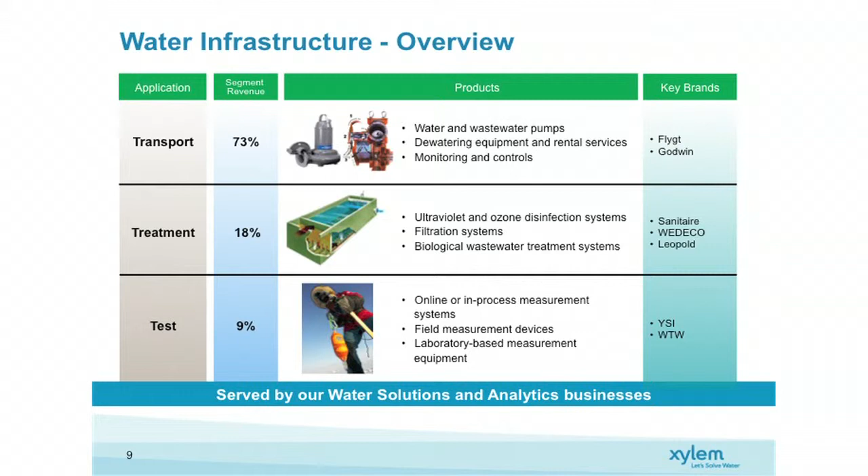But don't you have there, well, we don't do mechanical screens, all right? But we can put those in the system. But everything that has to do with the process control of a plant, be it water treatment or wastewater, be it industrial or municipal, we can design into it.

Okay. This is processing, wastewater treatment and reuse, and we've tried to concentrate on those parts of the process that are integral to the actual operation of the plant to achieve a given quality of water based on the parameters of the influent to achieve the goals of the client. All right. Not what we think the goals of the client are. Well, at least hopefully we don't design for that.

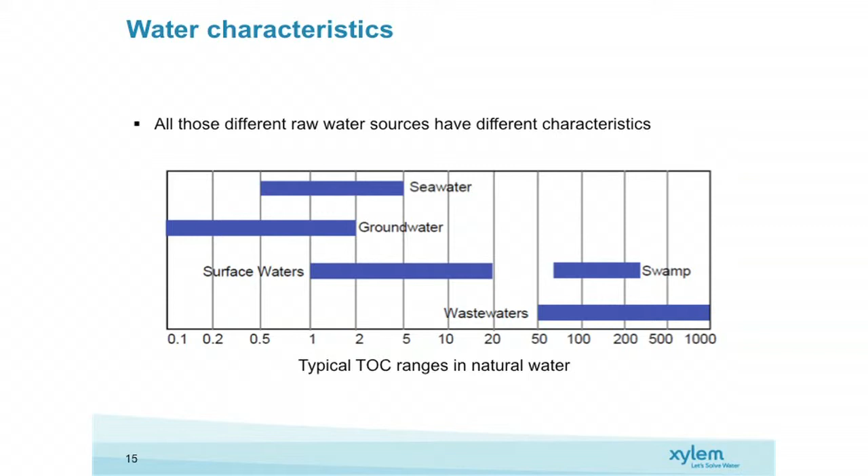Okay. We care a lot about water characteristics, as you do as well, but when you start looking at plant design, this is just an example of looking at TOC ranges in natural waters, and you can see how they differentiate. Swamps are interesting to work with, by the way, as a water supply. That's usually a membrane plant.

Okay. The second thing we need to know is precisely what is it you want to do with the water. Now you can come to me and say, well, we have to meet this water quality restriction. And that's fine. We're happy to do that. We're going to ask you another question about that. We're going to say to you, okay, once you meet this water quality, exactly what is it that you want to do with the water? And now we're talking reuse. We do a lot of work in reuse.

And one of the areas we do a lot of work in reuse in parts of the world is taking wastewater to a revenue stream. All right? Anybody do that here? Anybody sell their wastewater? No? Works real well if the law permits it. In many parts of Latin America, you can't do it. Constitutionally, you can't sell water at all by rights, which makes it difficult to pay for treated water.

But in Brazil, for instance, a major water treatment company in Brazil is called Sabesp, and they sell boutique waters. They produce from wastewater 3 different kinds of effluent water that they sell back to industry at different price levels, depending on what's required. And they do this successfully. Now, Brazil, of all of South America, is probably the least arid place you can go. They've got lots of water. Lots of fresh water. Problem is, most of it's polluted.

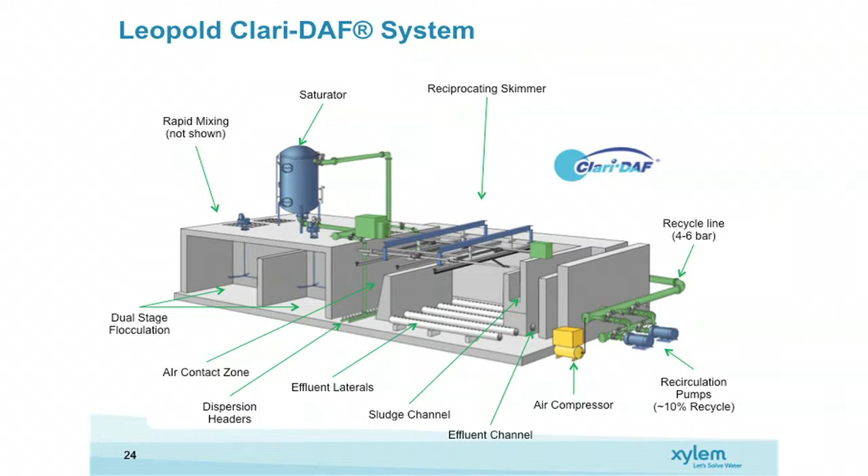Okay. But there's a lot of quiescent supplies in South Africa that can benefit from this type of technology, and it is available, and we'll work with you to design it.

I promise I'd kind of skip along here.

Okay? That's the only decisions you have to make. And then it becomes very simple to decide what technology you're going to use. Okay. So, what's available? Gravity media filtration. Near and dear to my heart. I actually worked for these guys for about 8 years at one point. I was always real surprised when ITT bought them and I wound up working with them again.

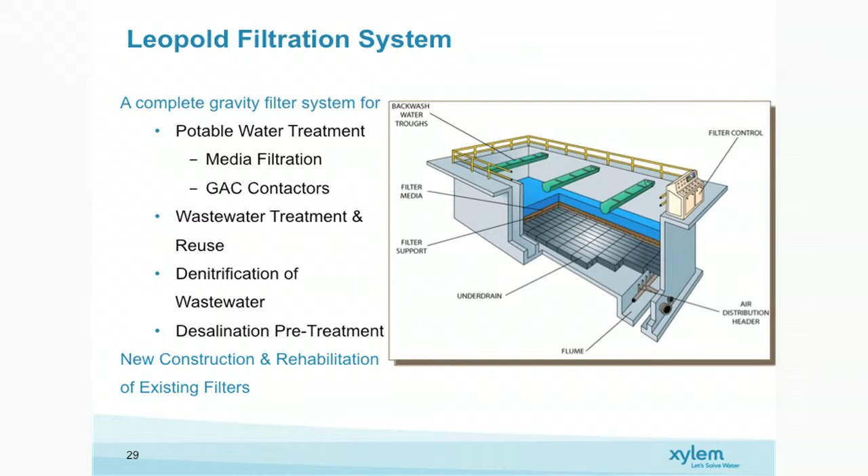Now you know Leopold primarily from the underdrain systems, and got a bunch of them showing up here up the road, and got a whole new one coming out that was basically designed to make it easier for contractors to install. We're going to talk a little bit about the ins and outs of the underdrain, but here's my cautionary note. Is the underdrain system the most important part of a gravity media filter? And the answer is, oh no, absolutely not.

What is? Nobody's going to raise their hand on that one? The answer to that question is the media itself. And you want to be very, very specific about that media. Now, one of the skills Leopold has that it doesn't talk about very much is the ability to determine the type of media required for the proper filtration of any source of water within certain turbidity ranges. Okay. Talk to us when you start talking about media.

Don't do what they did to me in Veracruz, Mexico, where they said, we're going to buy the media ourselves and we're going to absolutely follow your specifications. Called me up 3 months later when the filters blew up and said, it's got to be the underdrain. It's always the underdrain. And basically what they had done was the mayor's brother-in-law, who owned a sand company, loaded the filters up with beach sand. Beach sand doesn't work as filtration sand.

It also means that when I'm collecting water through the system, it filters down through the media, and because I got a cleaner filter in the back, my throughput through that part of the filter is going to be much higher than other areas of the filter, which means I'm not going to optimize my media. And when you don't optimize your media, what happens? You get breakthrough. When you get breakthrough, Madam Schwartz's crew is going to come around and do an evaluation on your blue drop, and you're going to lose, because you're not going to have your water quality.

So you want to have uniform distribution and collection across the filter at all times, and dual parallel designs give you that. They have balancing laterals, okay? That's what all this is about over here. And again, we can get into those discussions a lot more in depth. I'm just trying to give you a quick overview of what's available. And this gives a discussion on why that works this way. As you can see, this is a classic nozzle system over here.

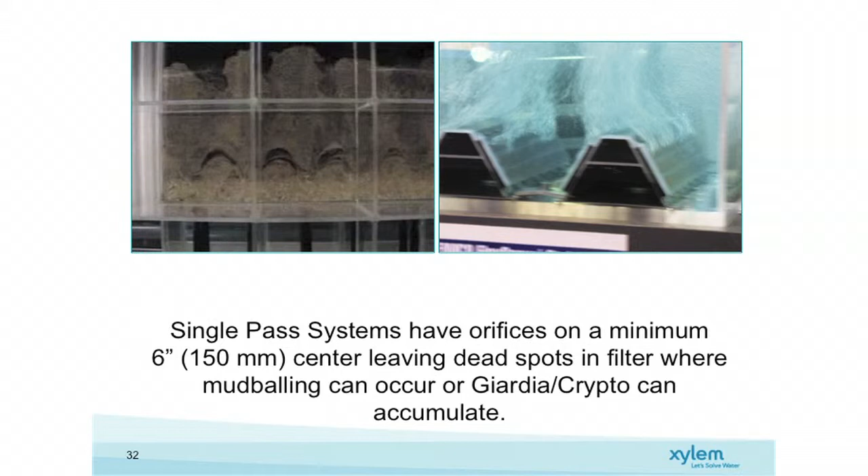And this is a classic TP arrangement over here. As you can see, you have dead spots that form up in between headers. What's the big problem with dead spots? Well, we used to talk about mudballing all the time. Then as regulations tightened up, we began to realize that giardia and crypto accumulate there and never, ever leave your filter, because it doesn't get backwashed.

So your filters can go septic, and we've seen that happen far too many times. And this gives you an idea of distribution through the system. Okay, that's just history of the drain. Now, one thing I want to touch on. Well, I can do this after we talk about desalination.

So one of the applications for filters we discussed was desalination. That was one of your four application points for gravity media filtration. Why do we care about pre-filtration on large desalination plants? Now, is desalination an issue in South Africa? You bet. There's probably 20 to 25 projects either in design or getting close to approval for desalination in South Africa. That's a lot of projects, big projects, not little projects.

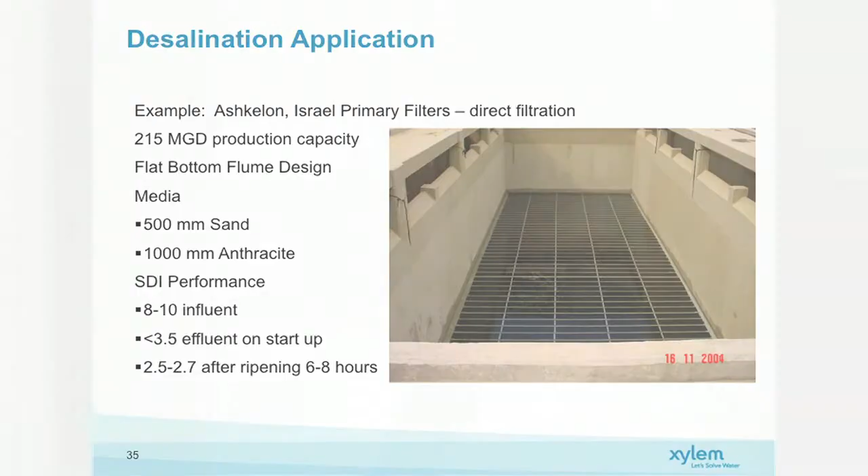What it'll deliver, and this is the big deal, delivers 2.5 to 2.7 after the filters are ripened in. But the most important thing is SDI performance. You want to get SDI under 3. These will deliver. These filters often come with a DAF.

So clean water treatment: RO systems, UF systems, membrane systems. Why do you do this? Because when you look at membrane solutions for clean water, you're basically dealing with one of these two arrangements. In all cases, whether you're dealing with membrane systems or media systems, your biggest concern is how do you pre-treat?

Biggest concern with gravity media filters is what do I do when it rains really hard in the wintertime and the turbidity in the river I'm pulling my water from jumps from 300 to 2,000? What happens when my TSS goes up like that? How do you deal with that? That's a tough question. It really is, because you will foul your filters. There's no magic solution to that question.

Upflow clarifiers work pretty well. We will usually recommend somebody else's. You can also do some kind of quiescent tankage if you got the space. But it's very important to get your TSS down to something you can deal with to reduce your chemical cost. So when you have those high spikes, you want some type of mechanical device. Remember, this is all mechanical, all hydraulic. Nothing magic here. You want some kind of means to drop your high turbidity loadings, your high TSS loadings, before you go into your flocculation.

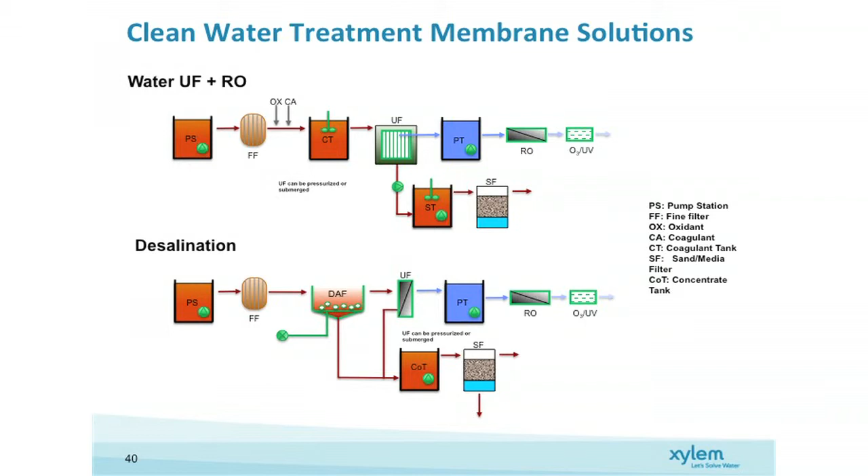So, so we get back on time frames, I'd like to cut it off here and finish this discussion in the afternoon session. And I would really like to get some participation from you on that, because I want to talk about applications for biological systems. Because you'll see here in our offerings, we do all kinds of potable water systems, containerized influent, desal. We use some GE membranes in particular applications, plus others, depending on what the situation is. We act as an integrator.

Okay. And so my question to you, so I'm better prepped for that afternoon discussion, is conventional activated sludge a common application here in South Africa? We got wastewater operators out there. How many of you guys run the standard CAS system? Do we even need to talk about wastewater this afternoon? Do we have anybody here who cares about wastewater? Yeah. How about SBR type systems? You guys using batch reactors?